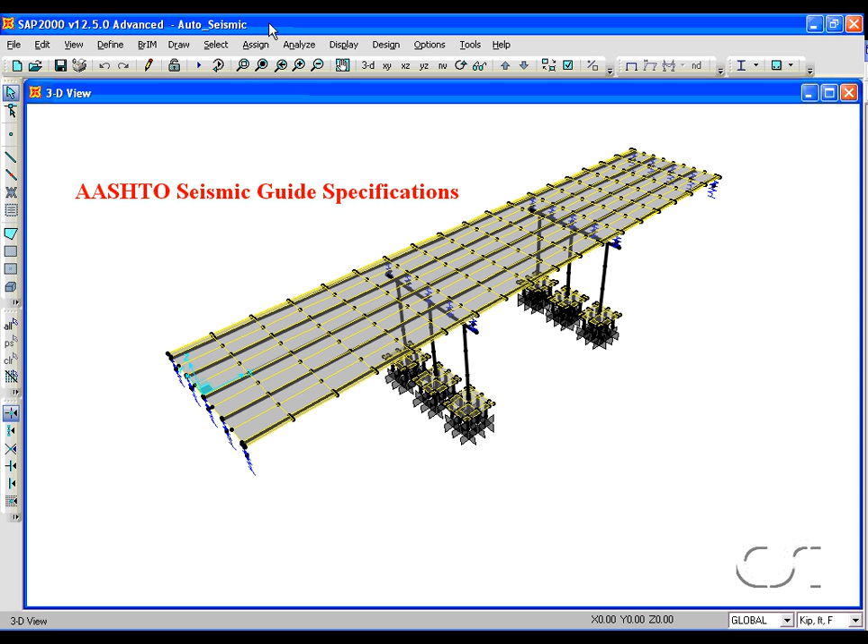This tutorial will show the powerful tools that the SAP 2000 Bridge module offers for the automated seismic design of bridges. Following the procedures described in the AASHTO Seismic Guide specifications, SAP 2000 can automatically calculate demand capacity ratios, including those for seismic design Category D bridges, and can produce a report containing all design results.

The seismic design of bridges using SAP 2000 consists of 8 basic steps. A quick overview of these 8 steps is as follows. In Step 1, we construct the model using bridge objects. The focus of the seismic design is on the bents. These bents will be isolated by the program when doing a pushover analysis.

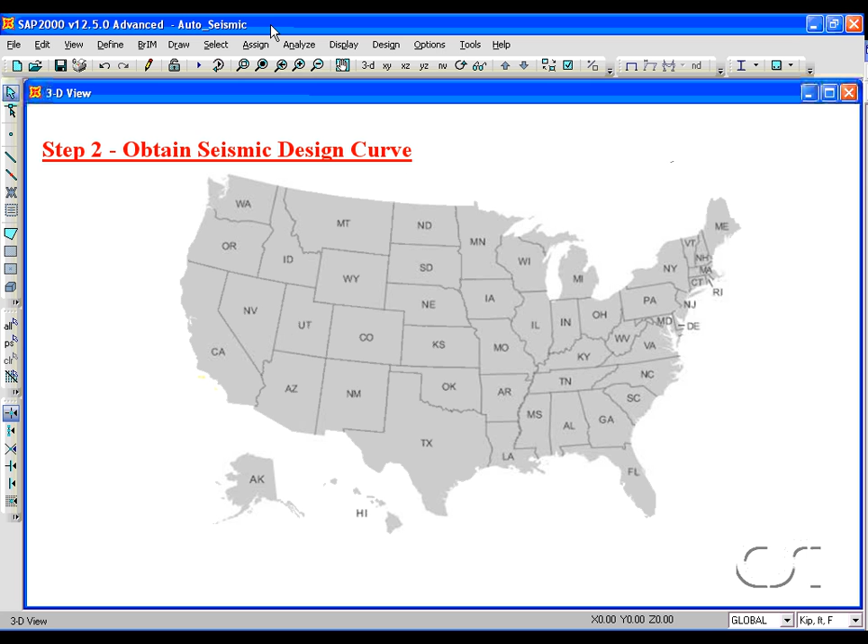In Step 2, we determine the ground motion hazard. This can be done by simply giving the bridge coordinates using latitude and longitude or zip codes. In Step 3, the program applies the dead load to the entire bridge and calculates the cracked section properties of the columns.

In Step 4, the program calculates the modes, performs response spectra analyses, which then gives the demand displacement values. If the bridge is a seismic design Category D structure, the bents and foundations are modeled with equivalent loads in Step 5.

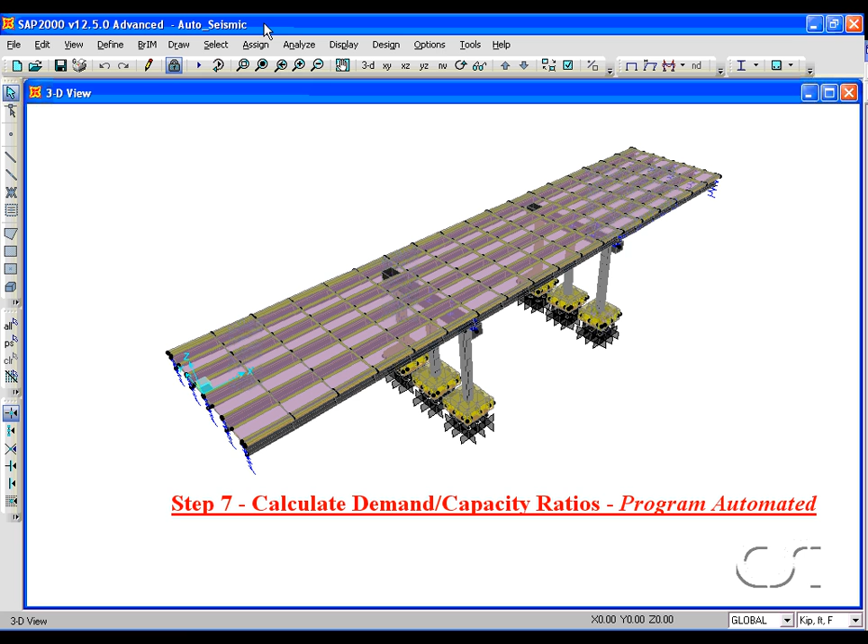In Step 6, the program calculates the displacement capacity, code equations are used for seismic design categories B and C, and a pushover analysis is performed for Category D. In Step 7, the program calculates the demand capacity ratios, and in Step 8, a seismic design report is produced. Now let's take a closer look at each of these steps.

Step 1, building the model. Our model has 3 spans of approximately 60 feet, consisting of an 8.5-inch slab supported with 5 3-foot 3-inch deep precast concrete girders. 2 bents, each with 3 36-inch diameter columns 26.5 feet tall.

These columns could have been fixed at their base, but for our model we are including a foundation consisting of a 4-foot thick pile cap supported by 14-inch diameter concrete piles with steel casing. Because seismic design is automated, the bulk of the work for the user is in building the bridge model. However, building a model is described extensively in other watch and learns, so we will go through this first step rather rapidly. Here's how we built the model.

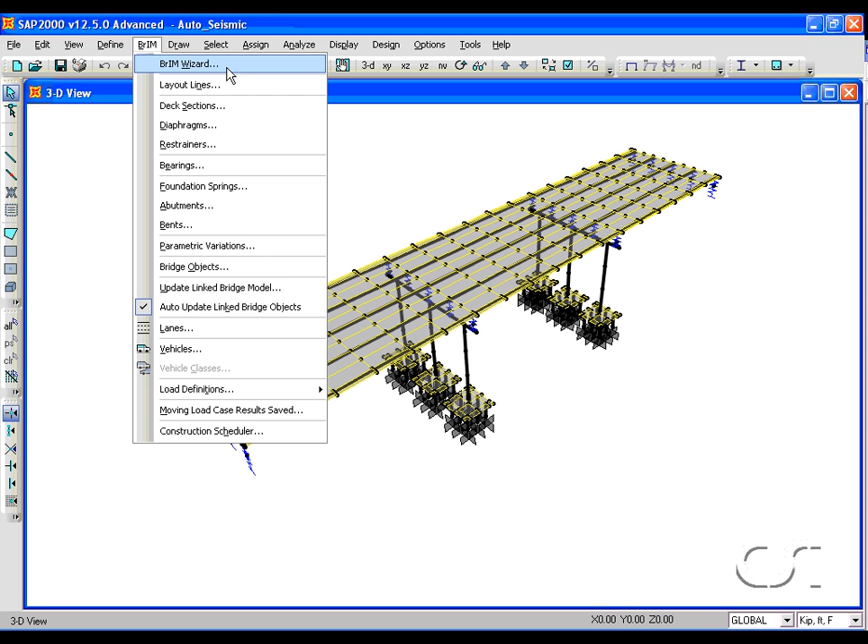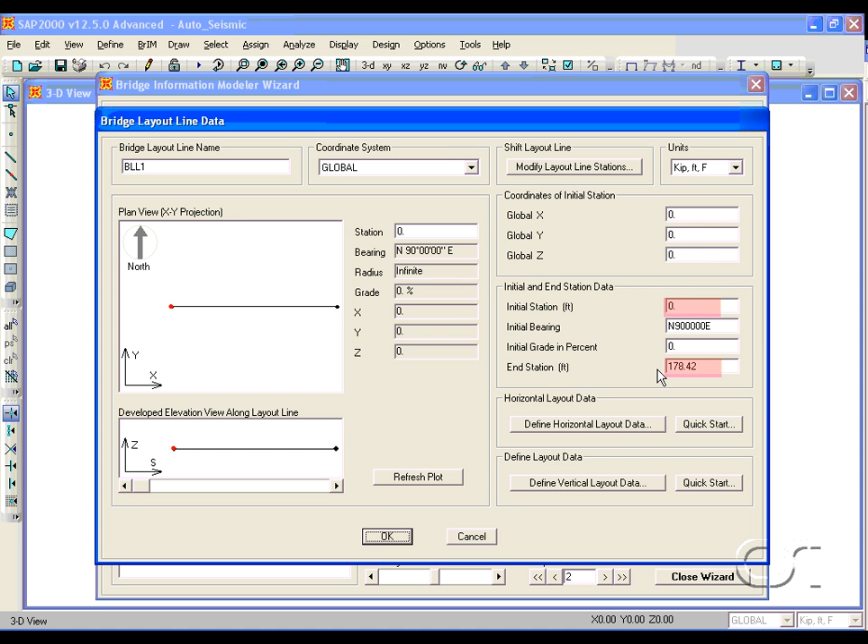We started by going to the Bridge Information Modeler wizard. The wizard guides you through the modeling procedure. The first item is the layout line. Double-clicking shows that we have one line defined. The line provides the coordinate stations for the bridge. Our model has 2 stations, an initial station and an end station 178.42 feet away.

For materials, we will use the 4,000 psi concrete and the A615 grade 60 for the reinforcing steel. Check the Show Advanced Properties option so that we can review the nonlinear settings for these materials.

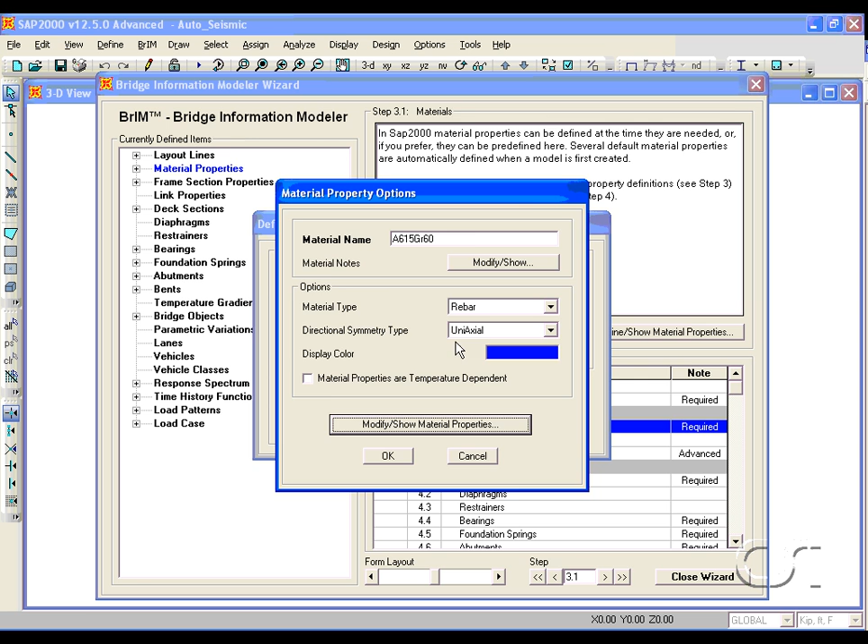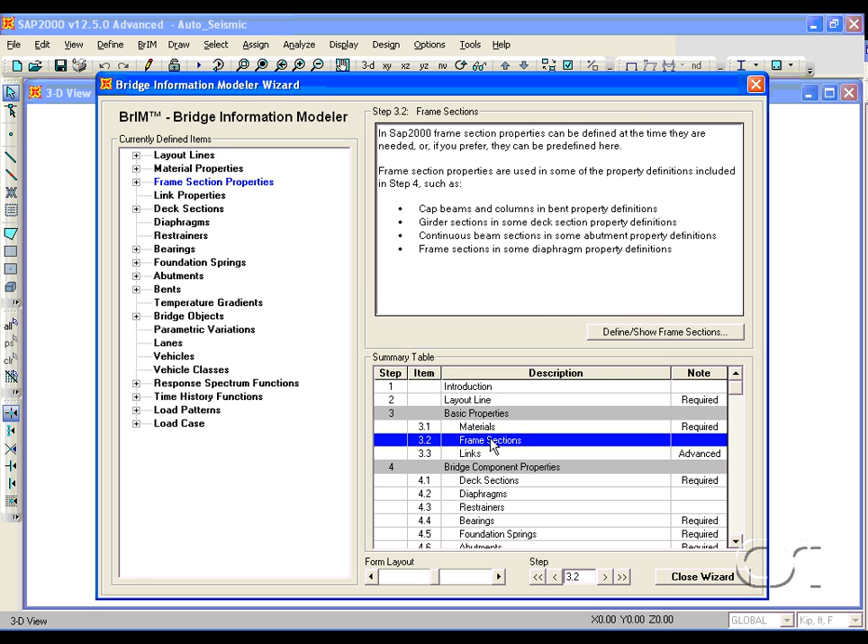Next on the list is the frame sections. The cap beam, the column, the precast I-girder, and the pile. The BRD sections shown on the list are equivalent frame sections created by the program to represent the combined behavior of the deck plus the precast girders when doing a spine model. The cap beam is a rectangular section 39 inches deep by 42 inches wide.

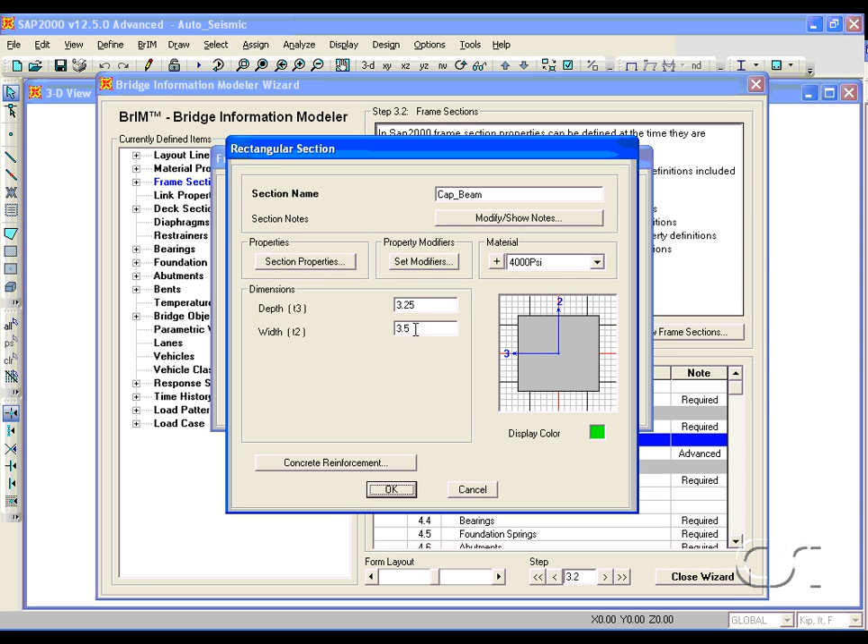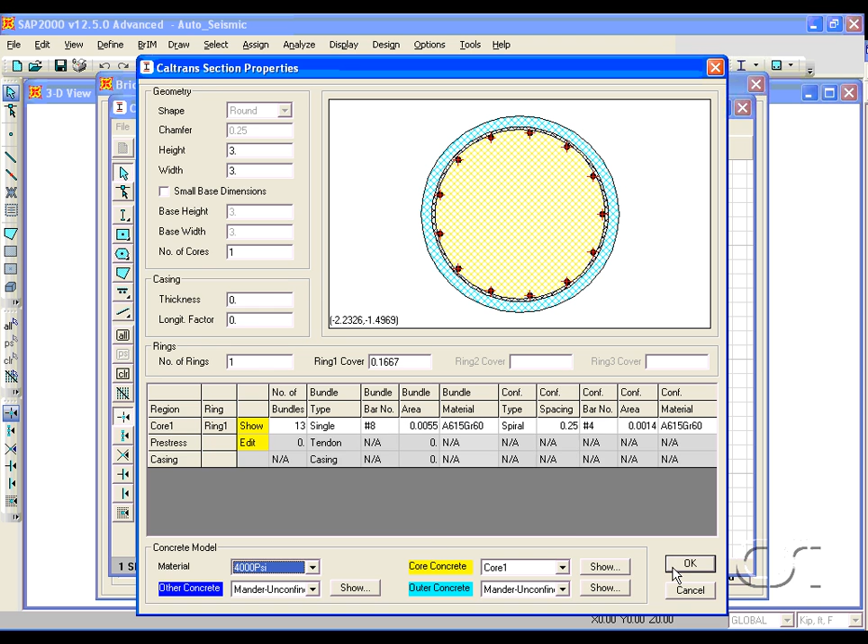The bent column section was created using the section designer. A right click shows that the section is 3 feet in diameter with 13 number 8 bars for longitudinal reinforcing and number 4 spiral confinement. The girder was created using the precast concrete I-girder form. Note that it is 39 inches deep and 13 inches wide at the top.

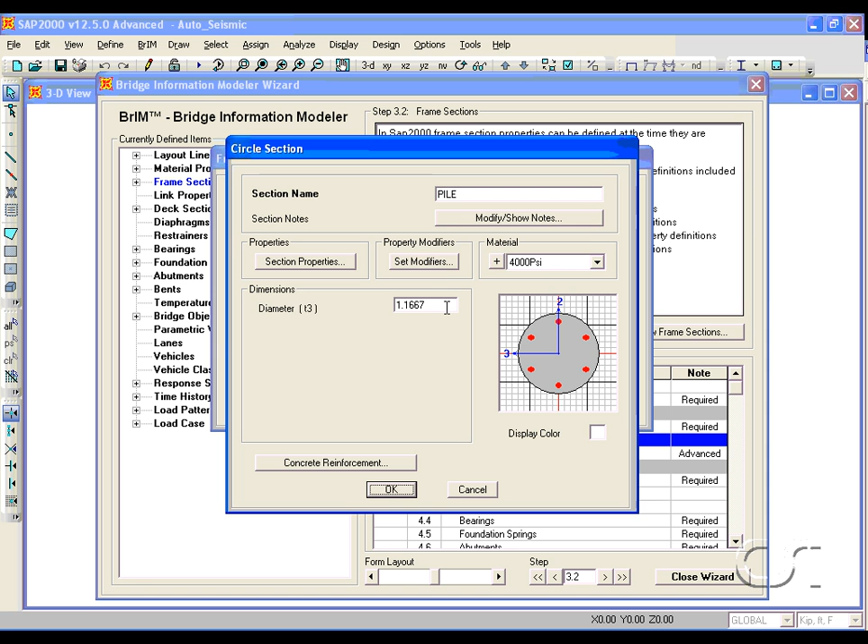The last frame section created by us was the pile. We created a round concrete section with a 14-inch diameter. However, the pile has a steel casing, so to account for this, we assign property modifiers to increase the moments of inertia.

Now we move on to the bridge component properties. Double-click on the deck section. We have a single deck defined with 3 interior girders and 2 exterior girders, which gives us a total of 5 girders. The girder section is the precast section just discussed. The deck has a width of 38 feet 10 inches and a slab thickness of 8.5 inches. The program takes this complicated cross section and converts it into a single BRD frame section for use when doing spine models.

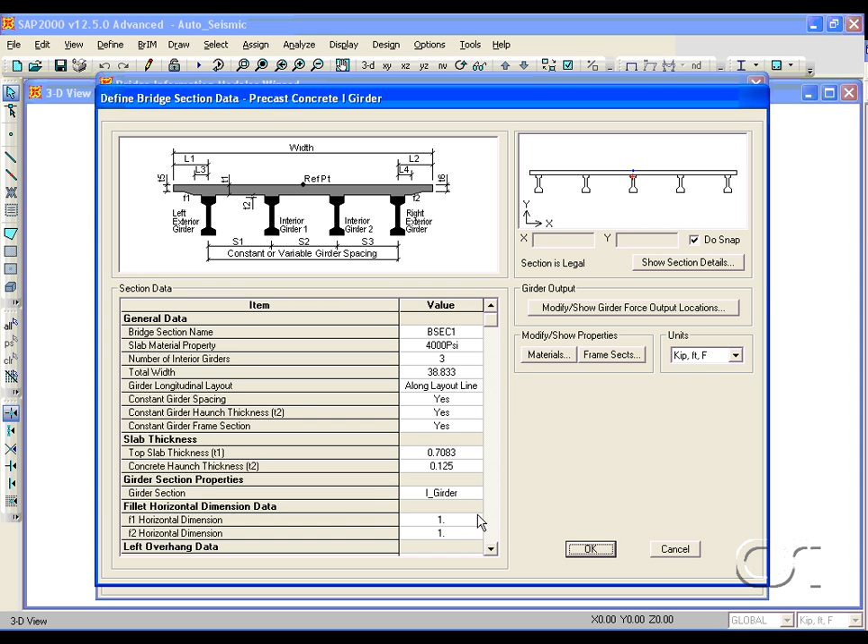The next item to review is the bearings. We have 2 different bearings. The first bearing is for use at the abutments and restrains motion in the vertical direction. The second bearing is used at the bents and restrains translation in all 3 directions.

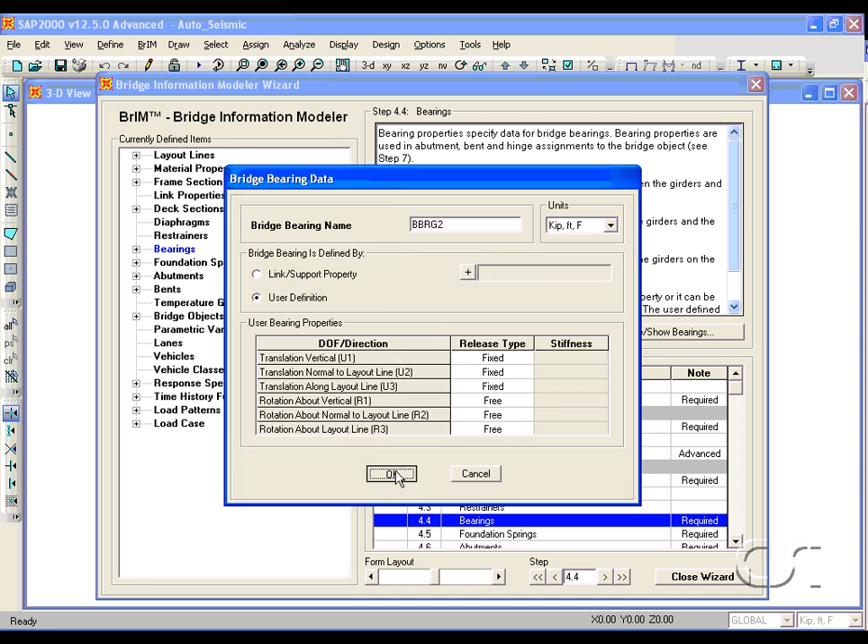Next is the foundation spring. We have defined one spring property to be used at the bottom of the bent columns. In this case, all releases are set to free, as we want the forces from the columns to be transferred directly into the pile cap foundation. If we were not explicitly modeling the foundations, we would set some or all of these releases to fixed.

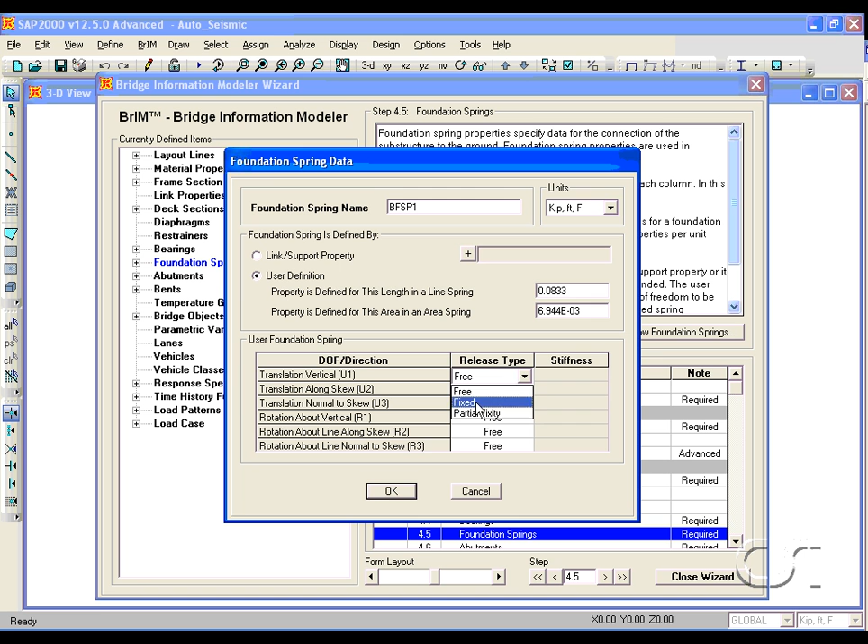For the abutments, we have a single type that provides a fixed connection to the bottom of the girders.

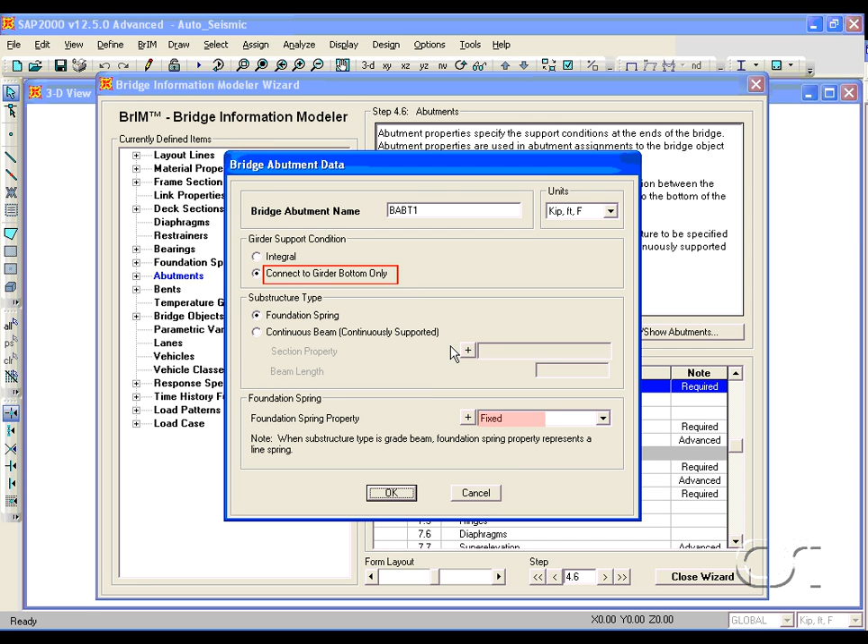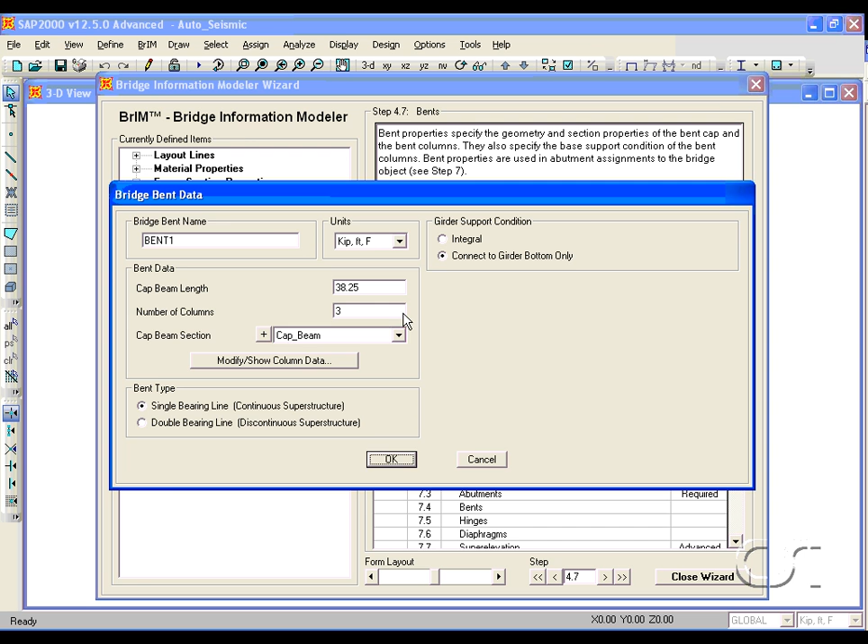We have defined a single bent for both locations. The bent consists of 3 columns topped with the cap beam we defined. The columns are 26.5 feet tall and use the previously defined foundation springs for the base support. At the top of the columns, all connections are fixed to the cap beam.

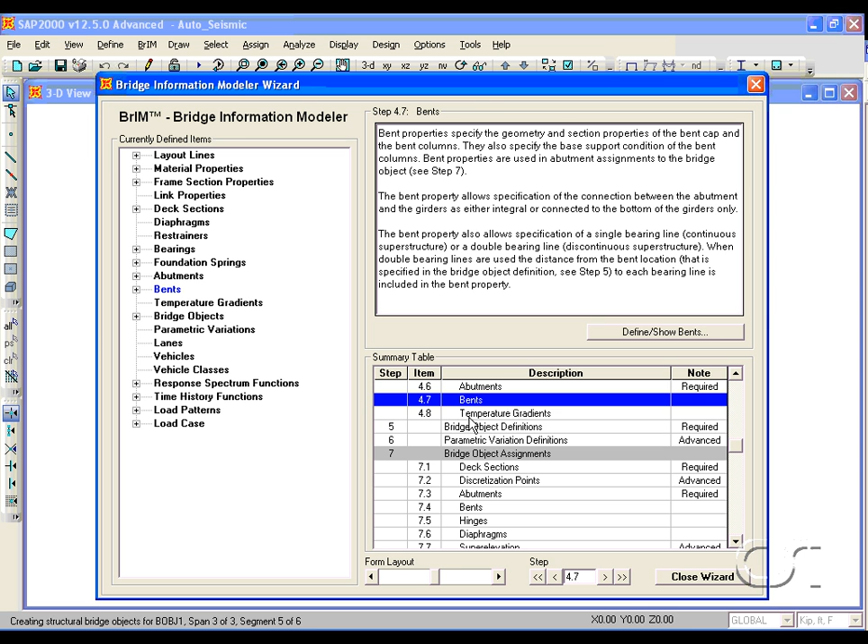For this model, we have a single bridge object that contains all of the components for our 3-span bridge. The reference line for the bridge defines the abutment and bent locations. Selecting spans and clicking the Show button, we see that the deck section is assigned to each span with no variation.

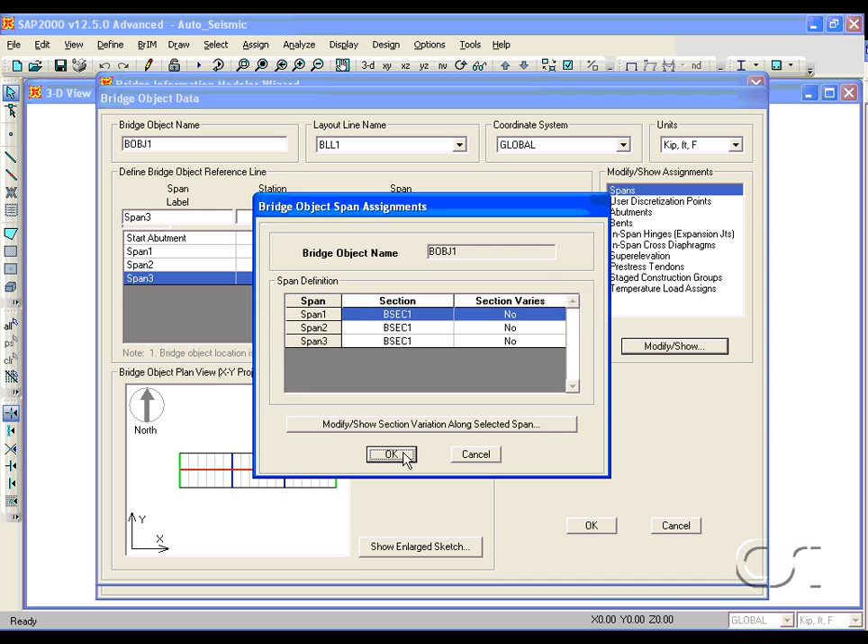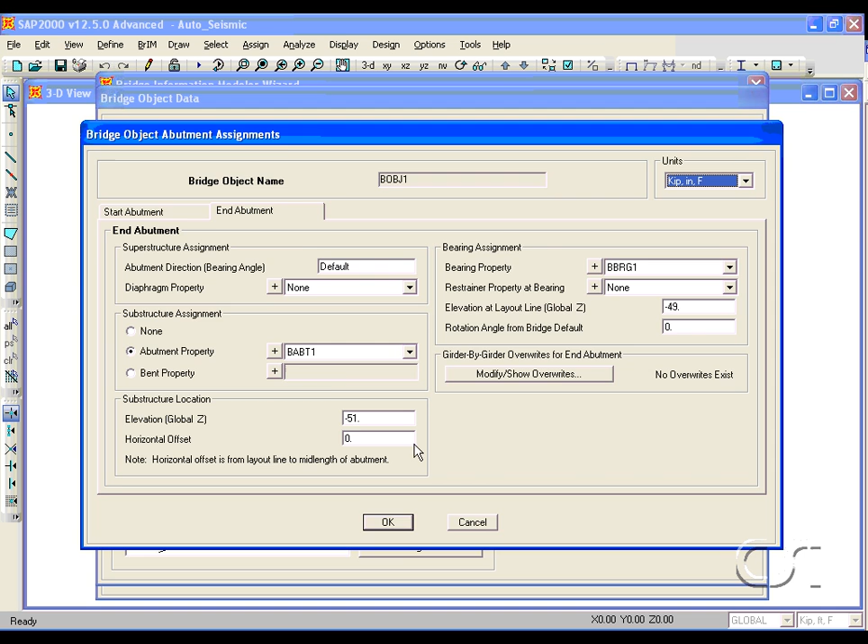The start and end abutments are the same. A 2-inch thick bearing resting on our fixed substructure. The bent assignments for each span are also identical. Again, a 2-inch bearing resting on our bent structure.

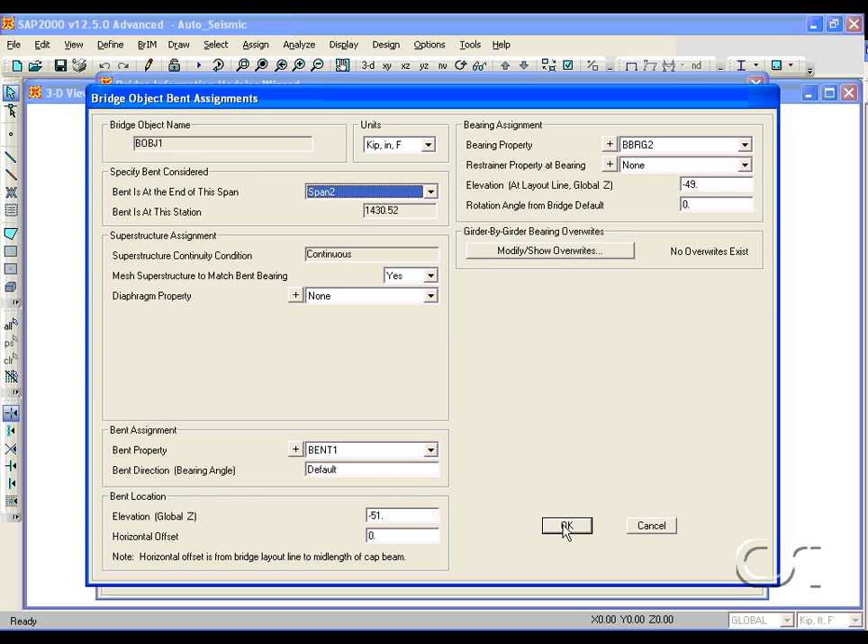After doing the assignments, it is important to link the model so that all components are included in the model.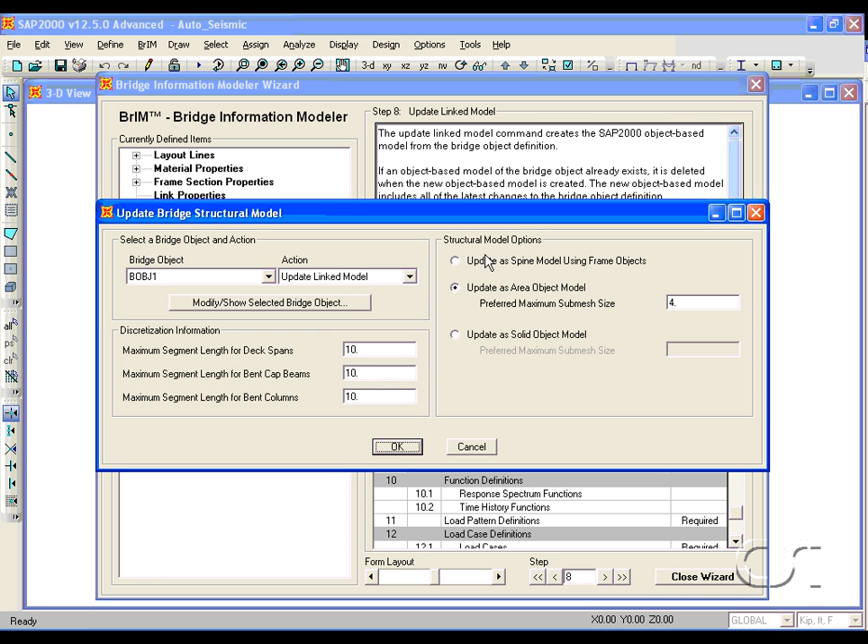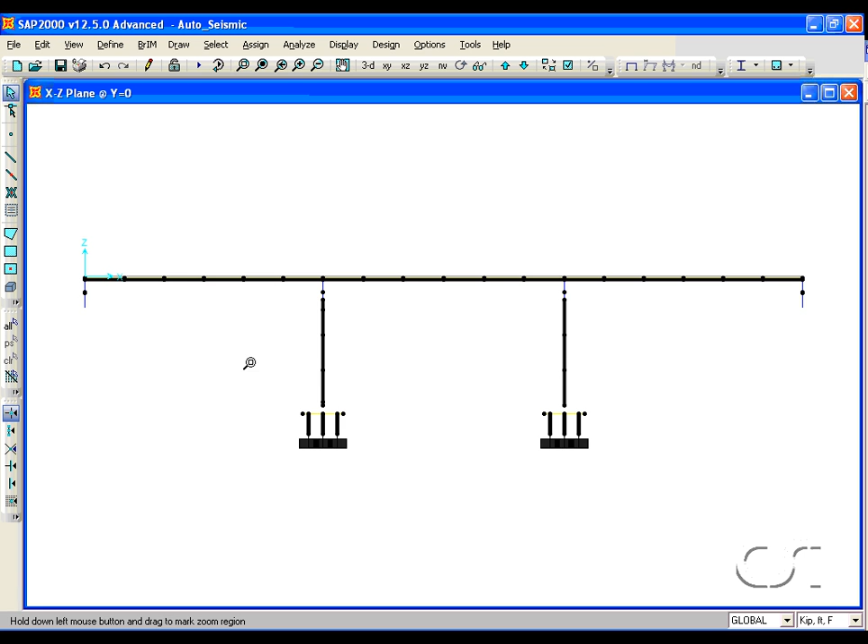Our superstructure is complete. The only item we did not review in the Bridge Wizard was the foundation. The foundation consists of a 4-foot thick area object for the pile cap, supported by the pile objects. Note how the bottom of the column is above the area object that represents the pile cap.

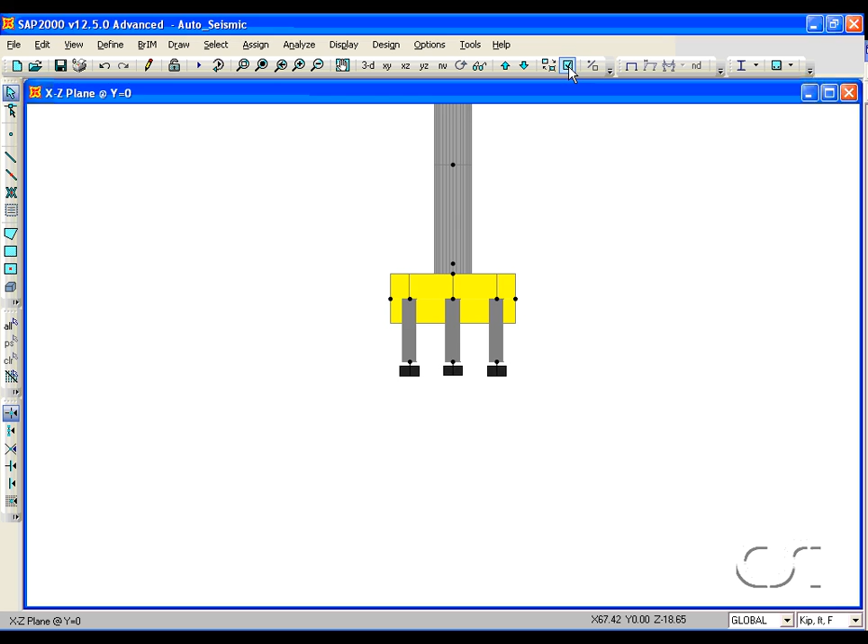If we extrude the objects, we can see that this is geometrically correct due to the thickness of the pile cap, but because the pile cap was modeled with a planar object, we use a weld constraint to connect the bottom of the column to the center of the planar pile cap.

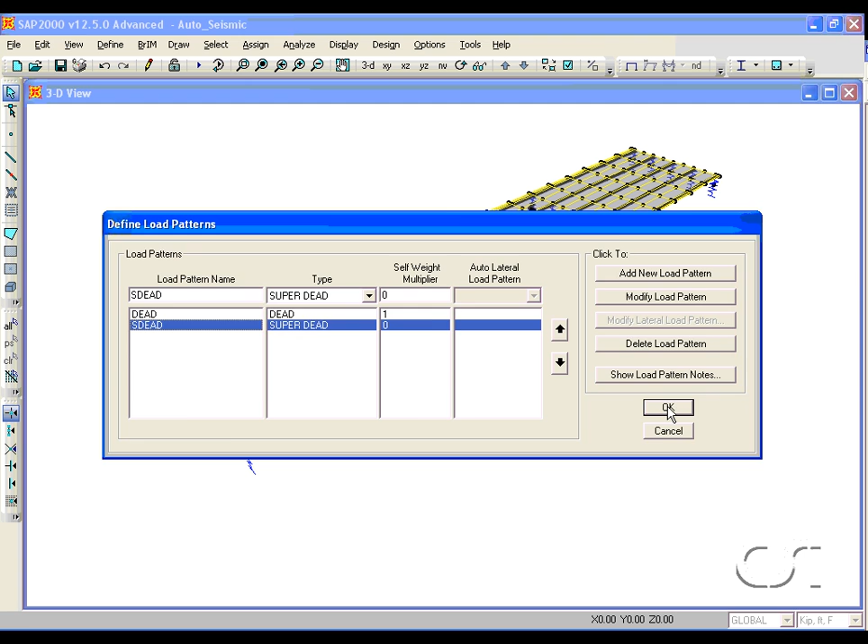For this model, the only static loads we will apply will be the dead and superimposed dead needed for the seismic analysis. We are now ready for step 2. Step 2 is where we determine the ground hazard.

We go to the Define, Functions, Response Spectrum command, and here we have many choices for response spectra functions. We will choose the National Cooperative Highway Research Program spectra. Function values may be determined by the program from latitude-longitude, by zip code, or by user input.

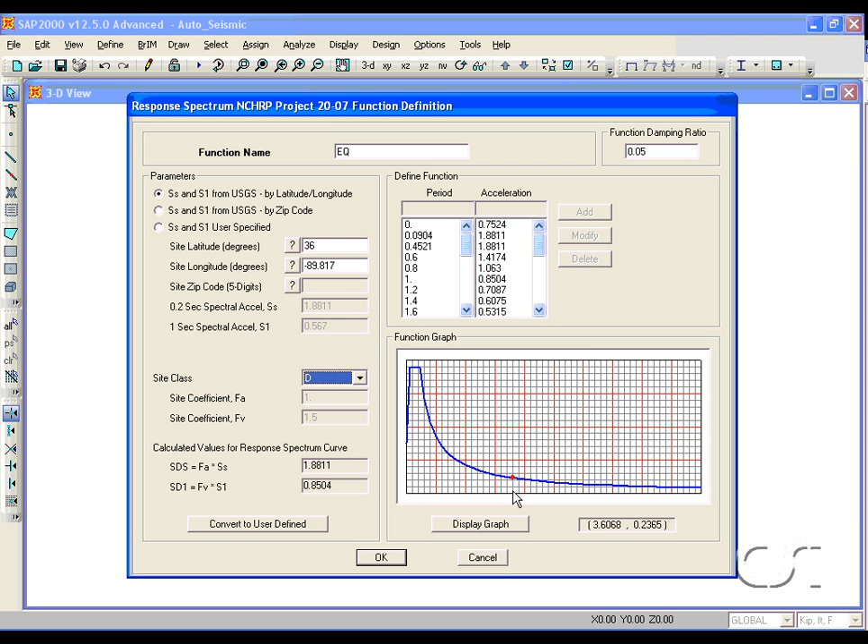We will input latitude and longitude. Note how the spectra values change based on the input. We will set the site class to D. With the determination of the site hazard, we are just about ready to start the automated seismic design.

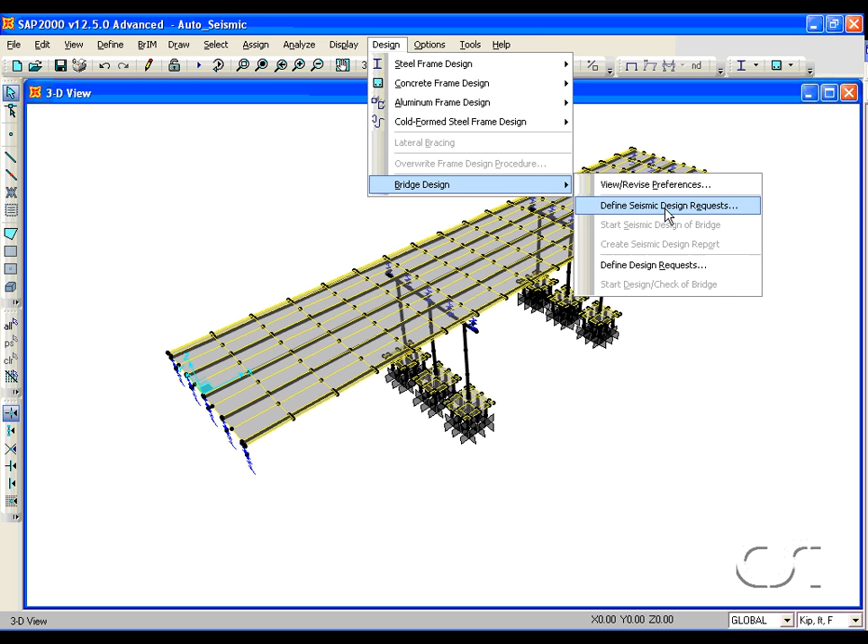The last bit of information that we must input is the design request. This tells the program what type of seismic design to do. Go to the Design, Bridge Design, Define Seismic Design Request command, and click on the Add New Request button. Note that the bridge object we defined is selected, as our model has only one bridge object.

Click the Modify/Show button and review the options set by the program. Note that the EQ function is selected, that the seismic design category is set to D, so a pushover analysis will be done. Also note that the entire structure is being used for the gravity load case. The cracked sections will be determined by the program, and the modal load case will be program determined.

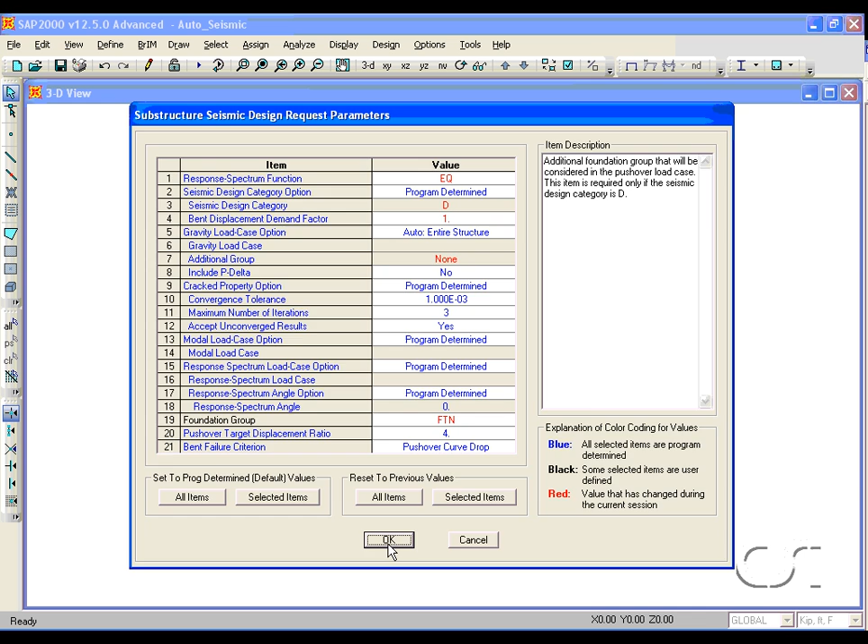Lastly, we need to identify the foundation group because we did not fix the columns at the base. Just to reiterate, the only load cases defined at this time are for the dead loads. We will return to this form after running the seismic design.

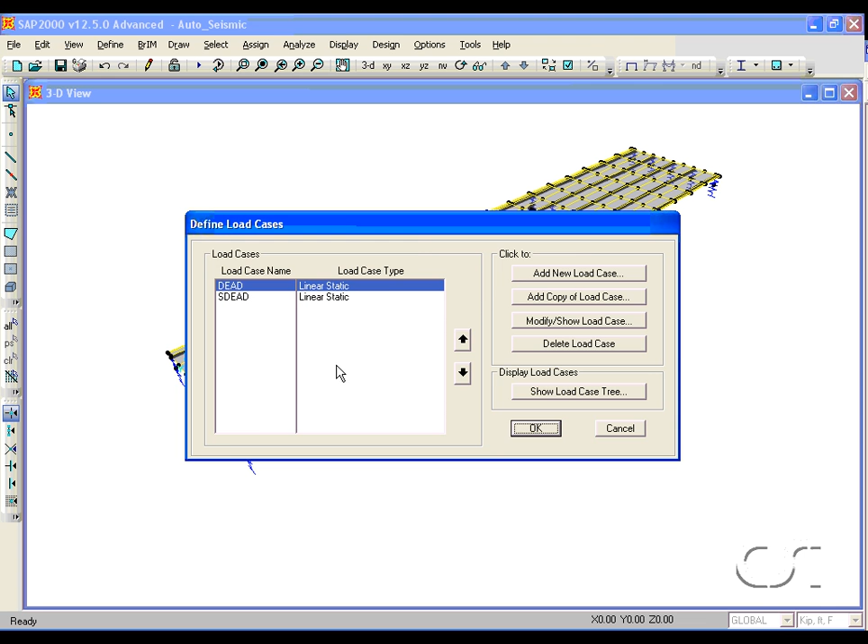The program will automatically create load cases for all of the other analyses that will be done, including modal and pushover. Now, we will start the automated seismic design procedure, which will do steps 3 through 7. This may take some time as a large number of different analyses are being done by the program.

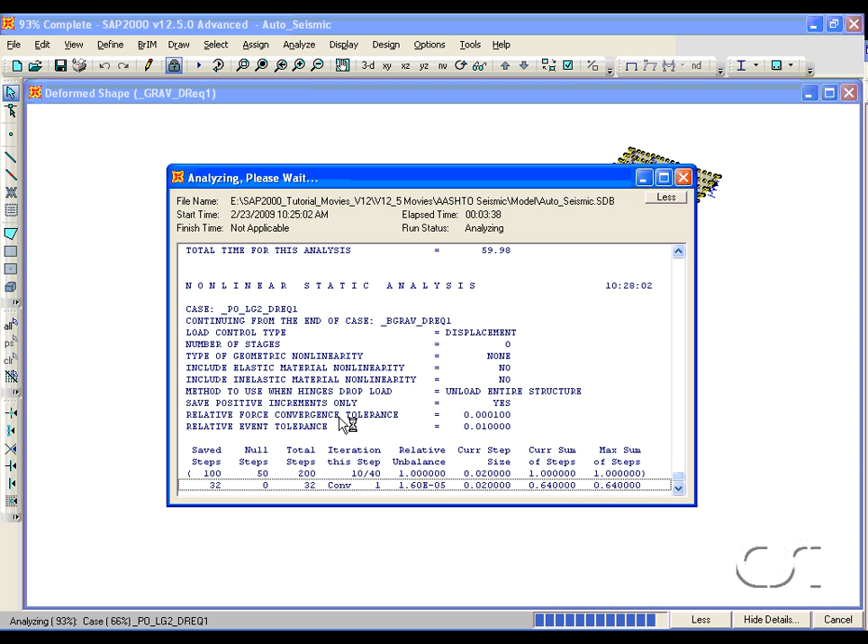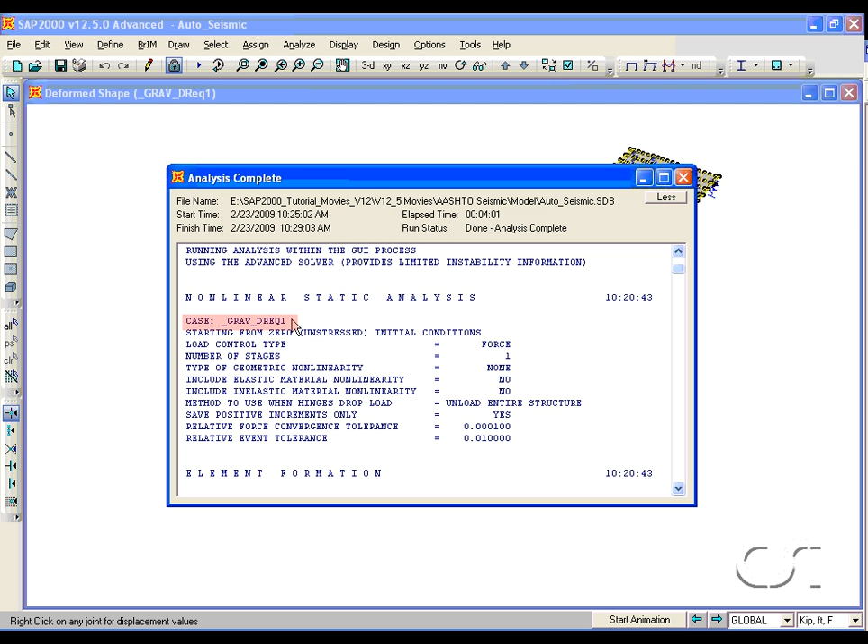Now that the analyses are complete, we can scroll through the analysis window to see exactly what the program was doing. First, it applies a dead load to the entire structure and iterates to determine the cracked section properties.

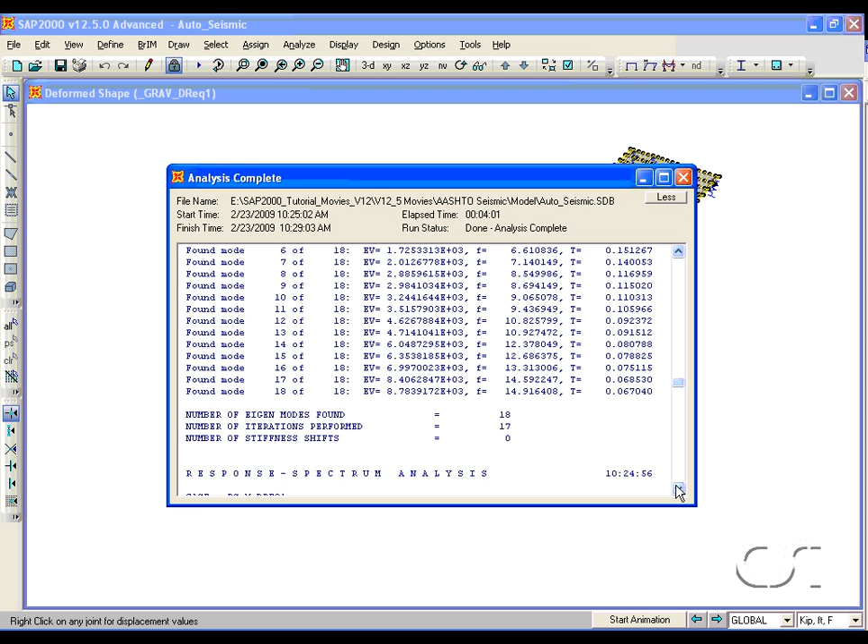Based on the cracked sections, it performs a modal analysis. With these modes, it performs 3 different response spectrum analyses. Next, it performs a dead load analysis using just the bents and equivalent loads. And lastly, it performs 4 different pushover analyses.

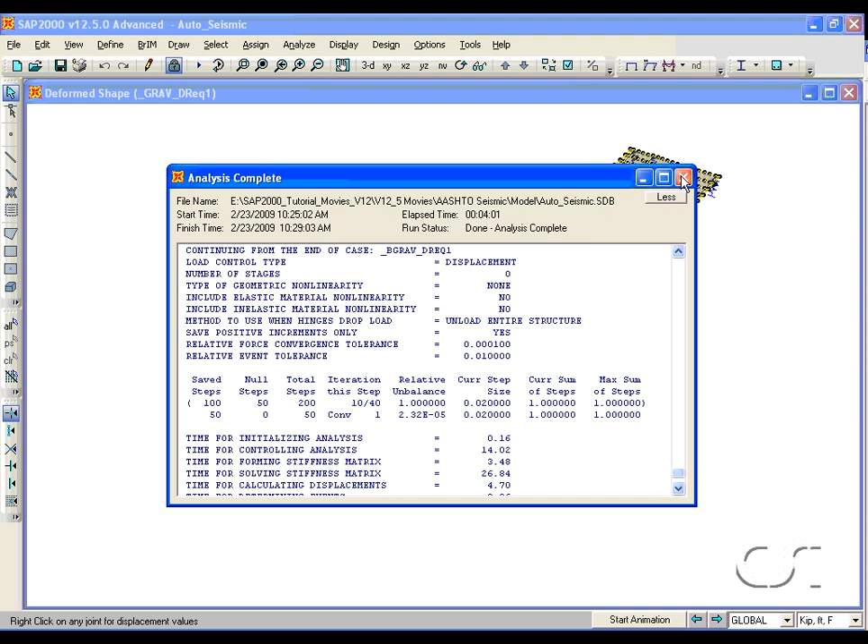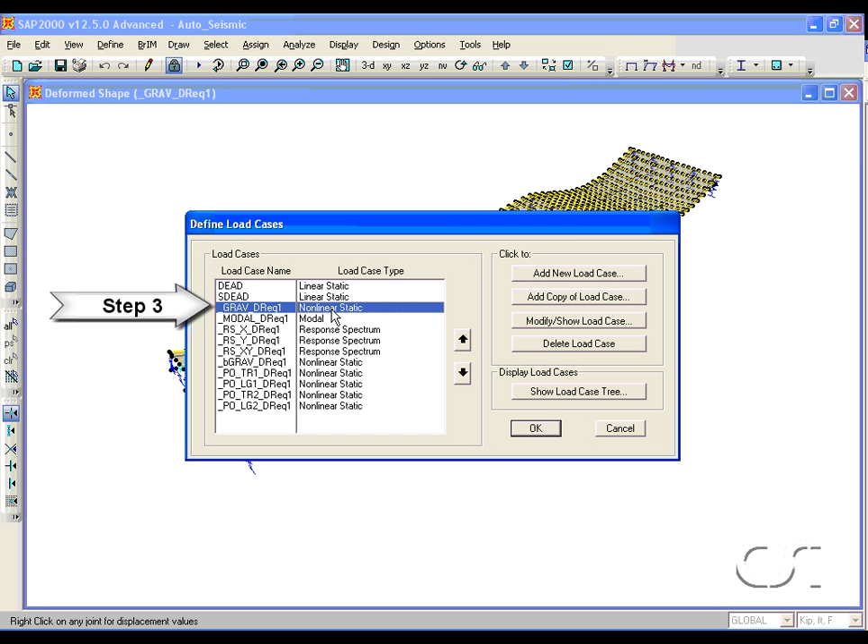Next, we will return to the load case form for a more detailed look at the automated analyses. Note all of the additional load cases that have been generated by the program. The first one represents the results of step 3, the application of dead load and the calculation of the cracked section properties. Dead load is applied to the entire structure along with the section modifiers.

This load case represents an iterative process when calculating the cracked sections. Element forces are determined, cracked sections are calculated, stiffnesses are modified, and the cycle is repeated until convergence is reached.

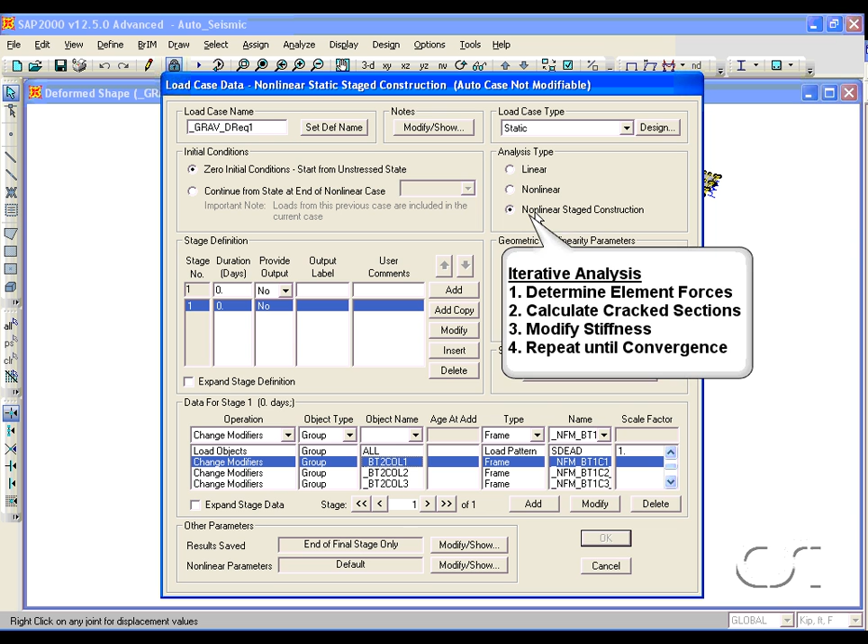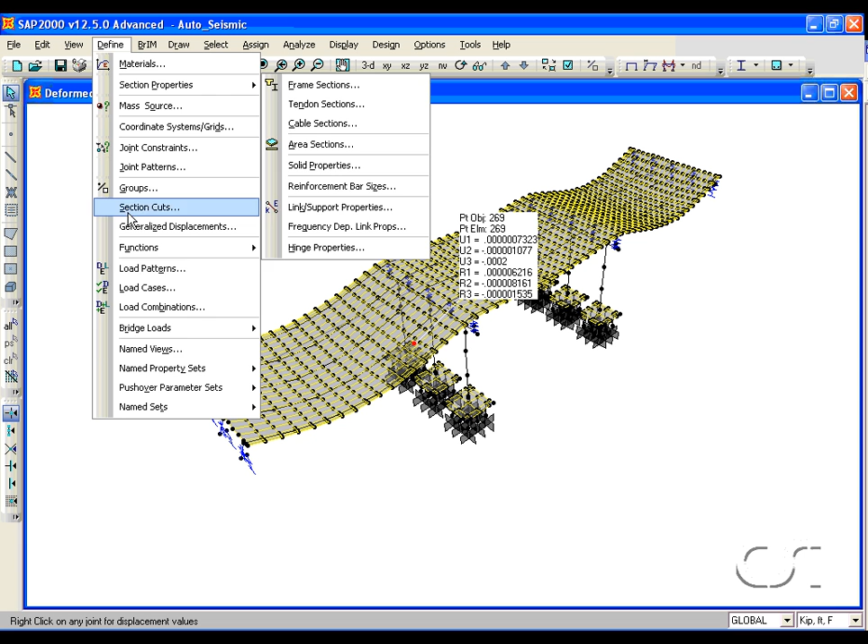The actual cracked section modifiers used may be reviewed by going to the Define Named Property Sets Frame Modifiers command. Here we see for Bent 1, Column 3, the moments of inertia are multiplied by approximately 0.28.

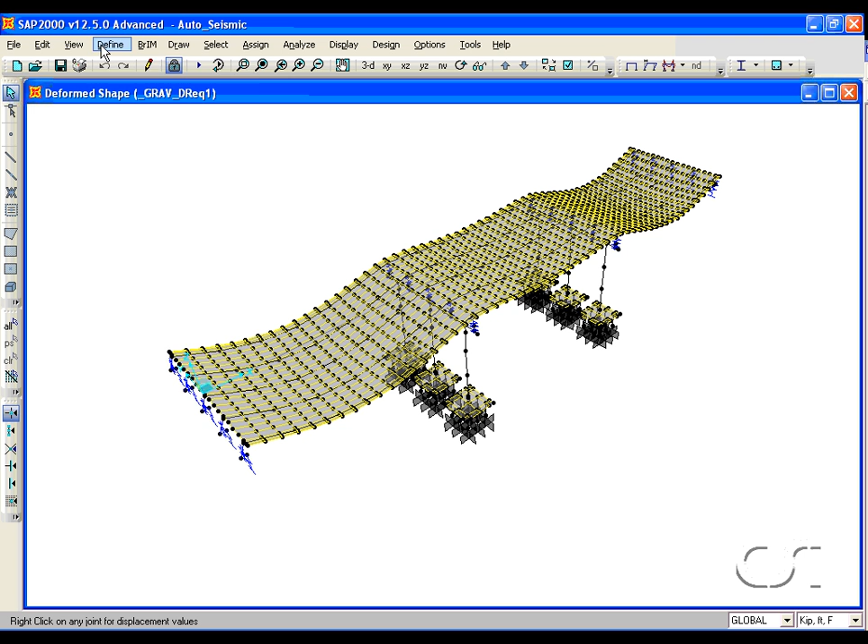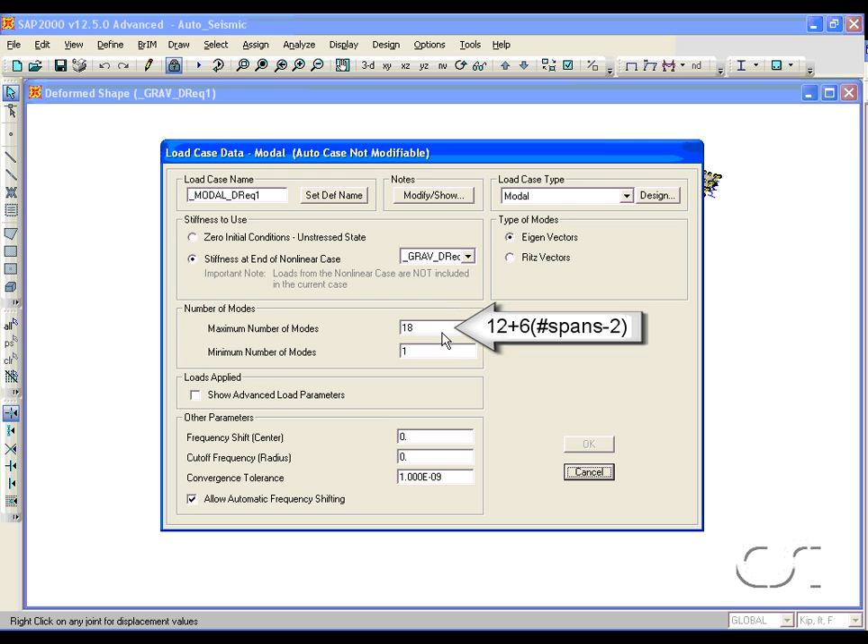The next four cases represent step 4, mode extraction, and then response spectrum analysis to calculate the demand values. Note that the modal case uses the gravity dead load case with the cracked sections as the starting stiffness. For this bridge, the program asks for 18 eigenvectors. The number of modes is determined by the equation 12 plus 6 times the number of spans minus 2, but no less than 12.

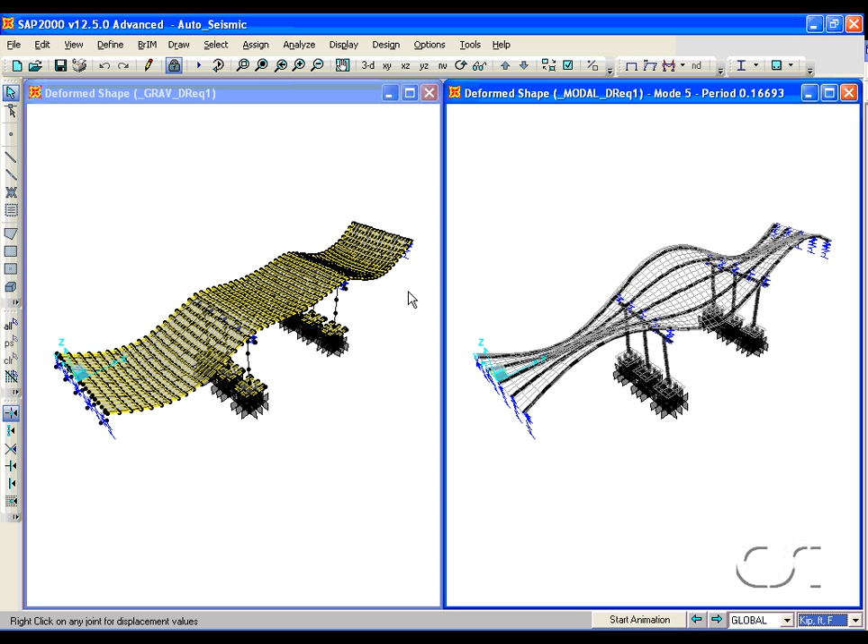Here are some of the modes calculated by the program. The next case is the response spectrum case in the x direction. Modal damping of 5% is used. The following case is the response spectrum analysis in the y direction.

And the last case applies the response spectra in both directions and combines them according to the AASHTO seismic guide specifications that require results to be combined using the 100-30% rule in each of the major directions.

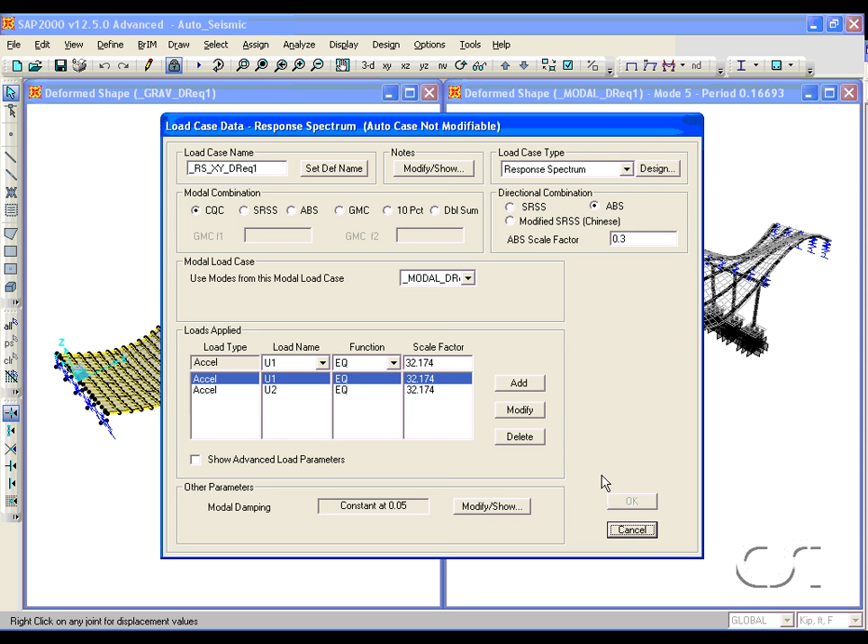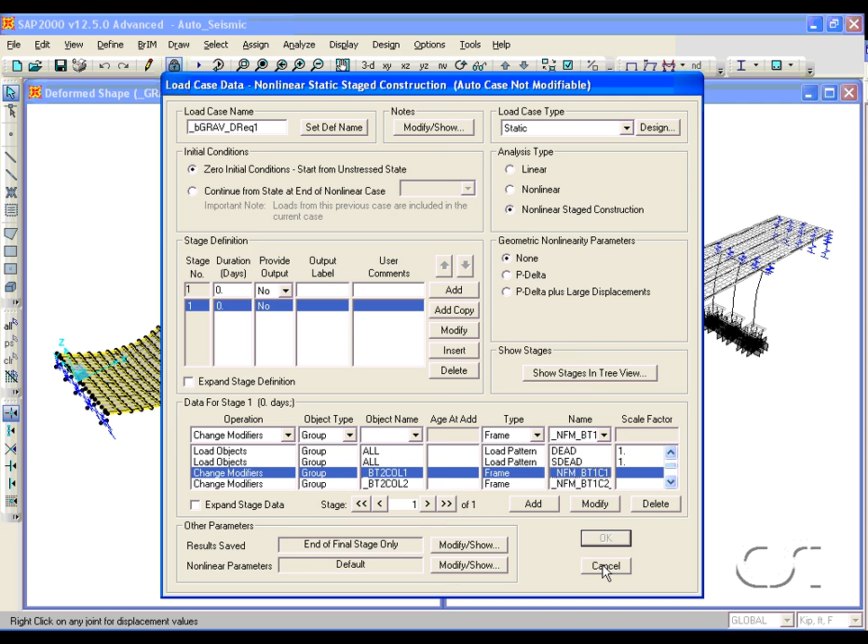The next case is associated with step 5, and again represents a dead load case, but this time consists of only the bents and foundation structure loaded with equivalent loads from the bridge deck. Again, cracked sections are used. This step is needed because the structure is seismic design category D, which means a pushover of the bents is required.

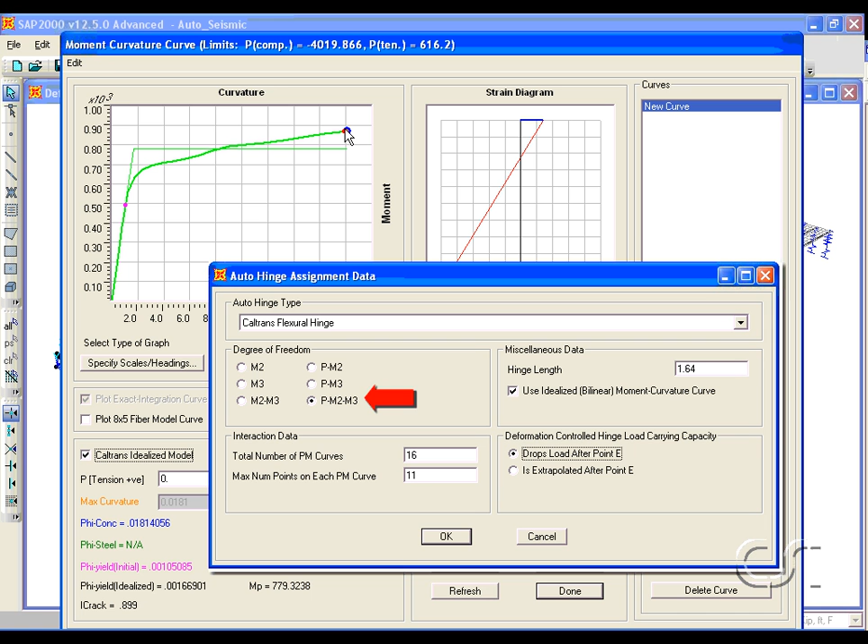Prior to step 5, hinge properties are calculated for the pushover analysis. The automated seismic design request uses hinge properties based on the AASHTO Caltrans idealized model. Note that the program uses PMM hinges, so properties are dependent on axial force, which varies as the bents are pushed.

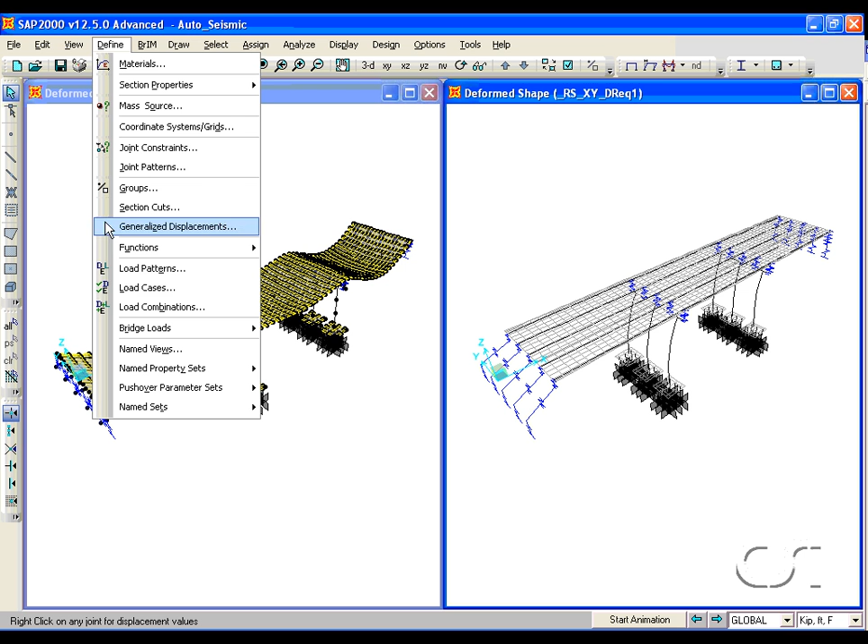Because the seismic design category is D, the program automatically performs a pushover analysis on the bents that are part of the earthquake resisting system. The last four load cases are associated with step 6 and represent pushover analyses in two directions on each of the two bents. The first case pushes bent 1 in the transverse direction. Note that the pushover starts from the gravity case for the bents. The program automatically sets all of the parameters.

The next load case is the pushover on bent 1 in the longitudinal direction. The third pushover case is for the second bent in the transverse direction, and the last pushover case pushes the second bent in the longitudinal direction.

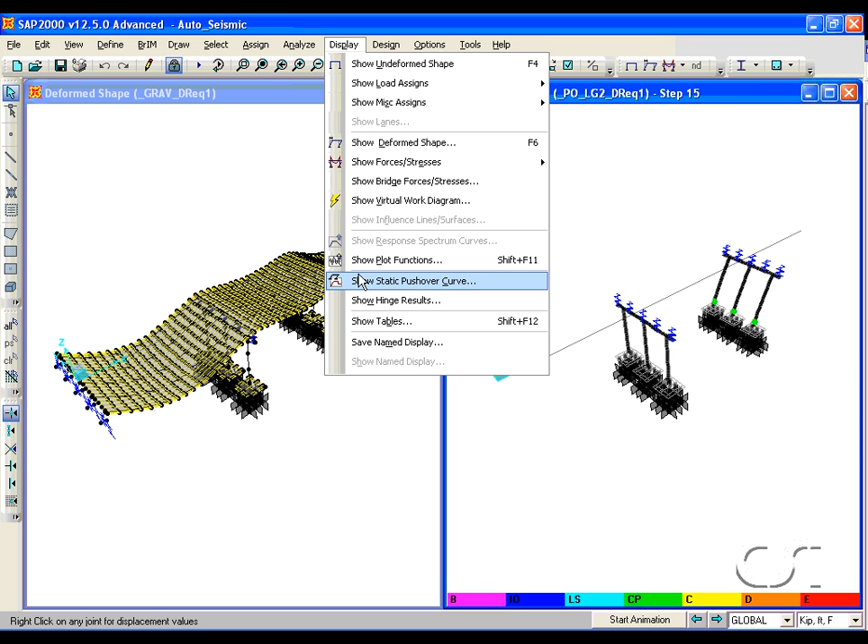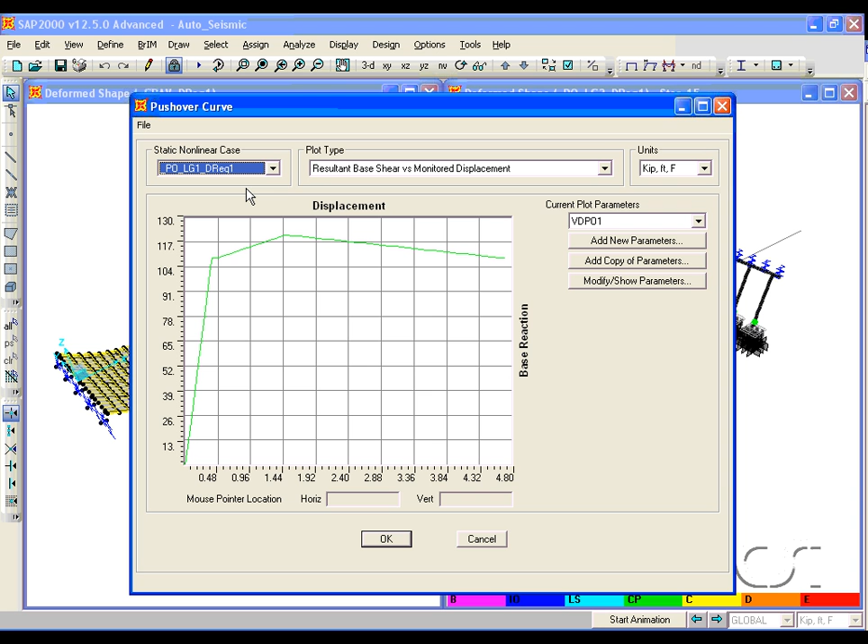From the pushover analysis, the program determines the displacement capacity. Going to the Display Show Static Pushover Curve command, we can view the pushover curves for each of our 4 pushover cases. Typically, the displacement capacity is taken as the point on the curve that is located just past the peak base shear location, where the base shear is 99% of its peak value.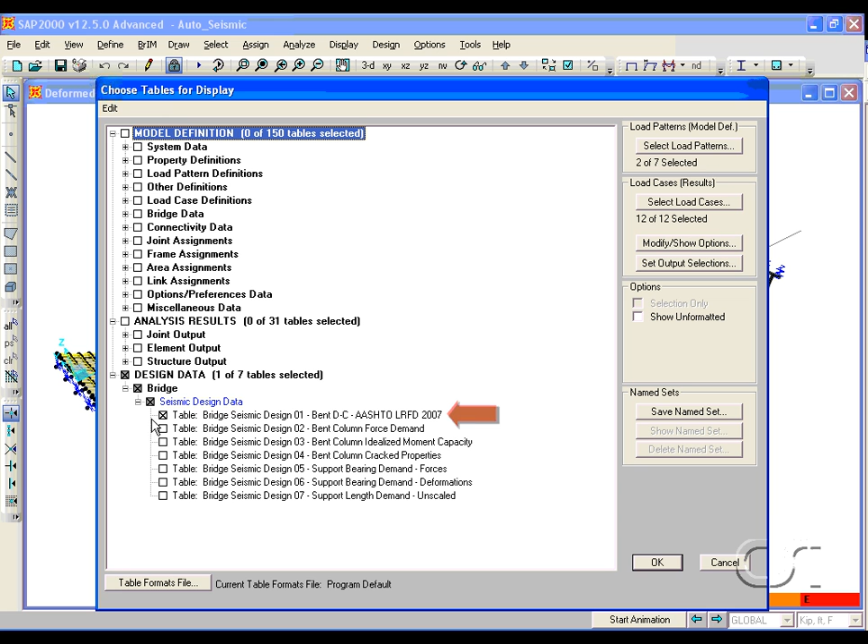Once the pushover analyses are complete and the capacity displacement has been calculated, the program automatically generates the demand-capacity ratios, which can be viewed by going to the Display Show Tables command and selecting the Bent Demand Capacity AASHTO LRFD 2007 table. Here, for each bent and each direction, the table reports the demand, the capacity, and the ratios.

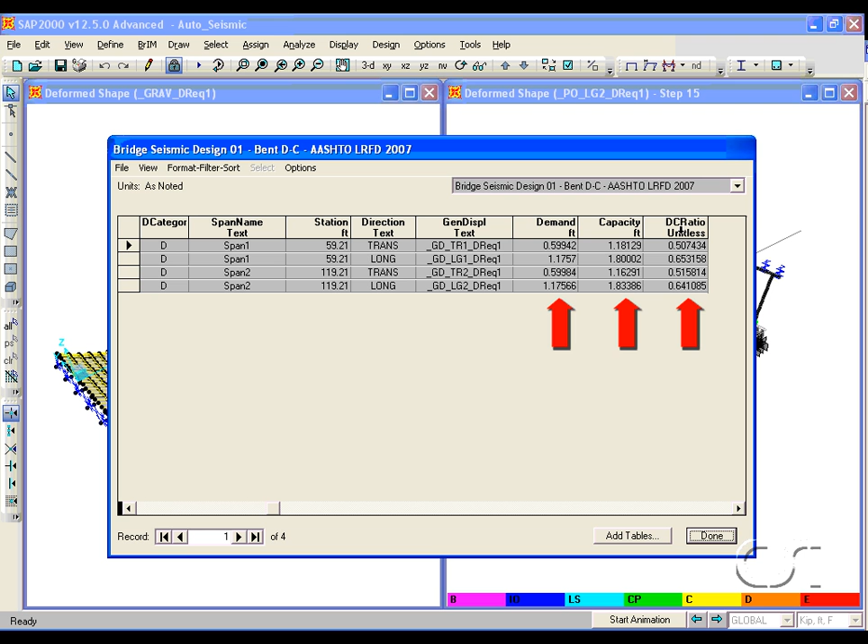The last step is to generate a seismic design report. The program will generate a comprehensive report with a single click. Go to the Design, Bridge Design, Create Seismic Design Report command.

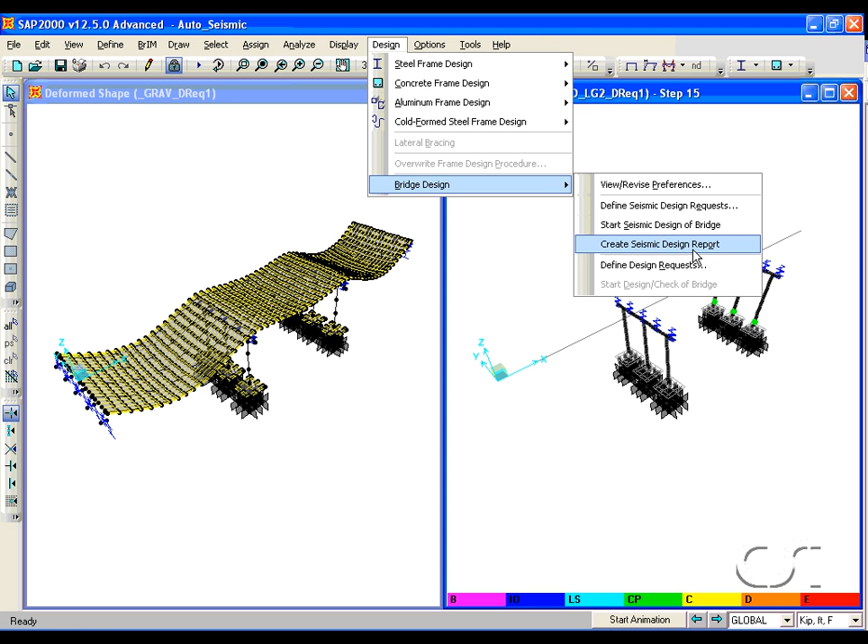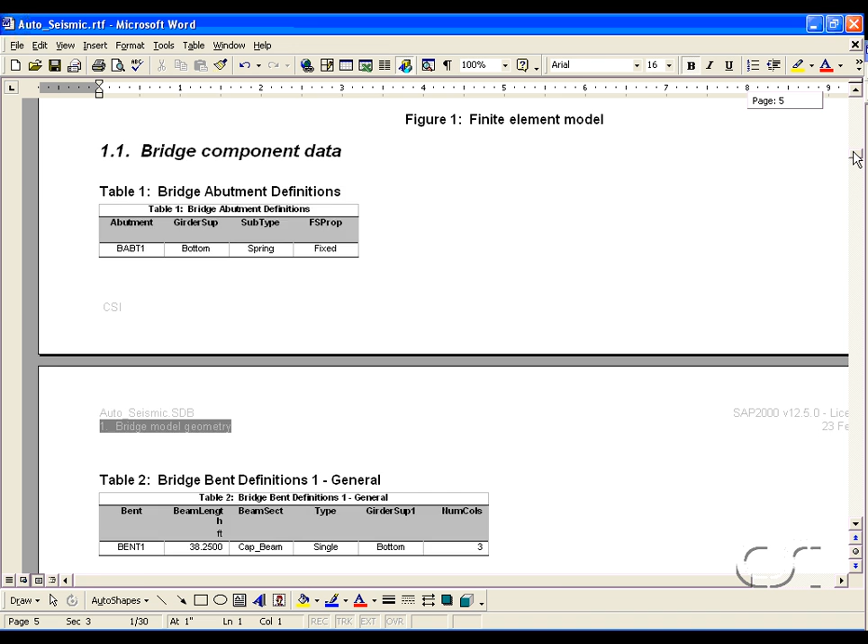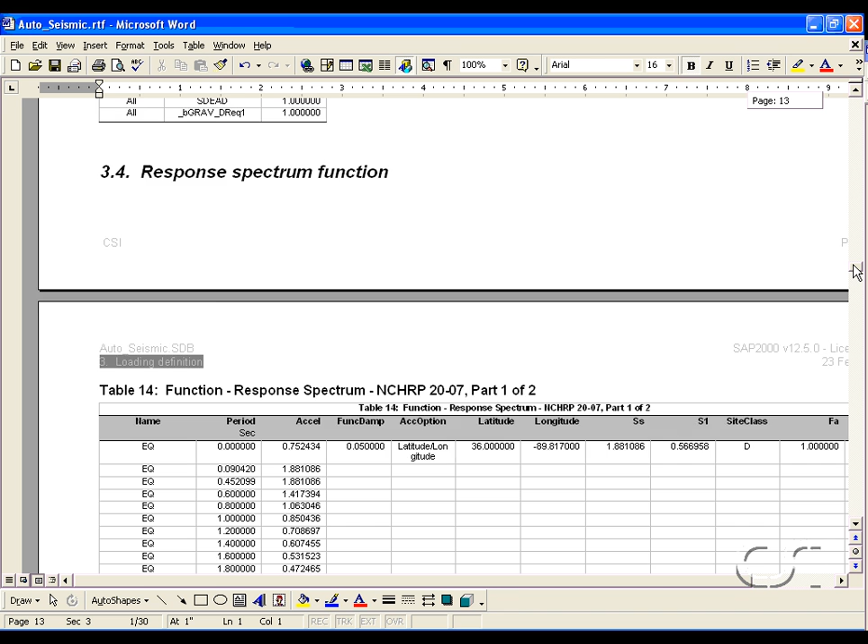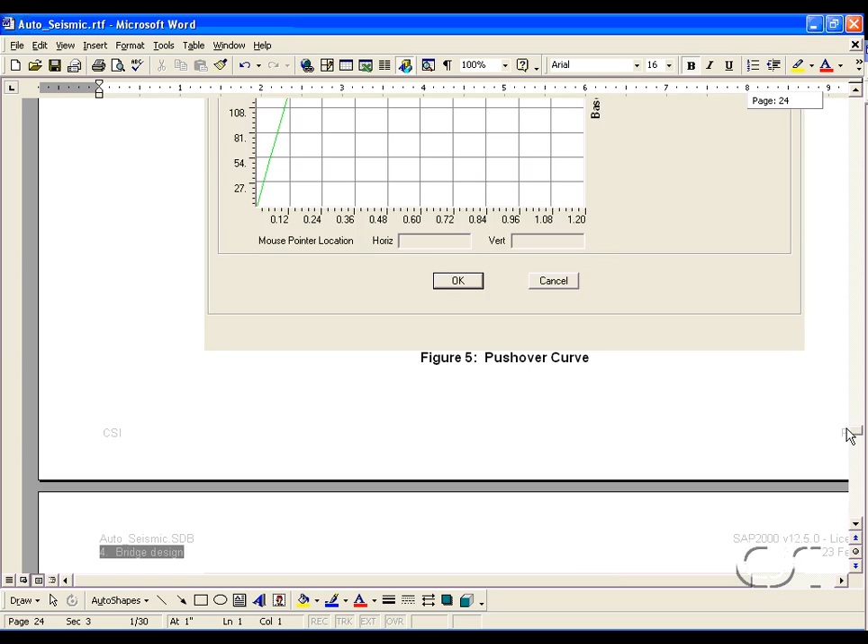The report includes a complete table of contents, images of the model, bridge data, section properties, loads, and all design results. Revisions may be done directly by the user. This concludes this tutorial on automated seismic bridge design.